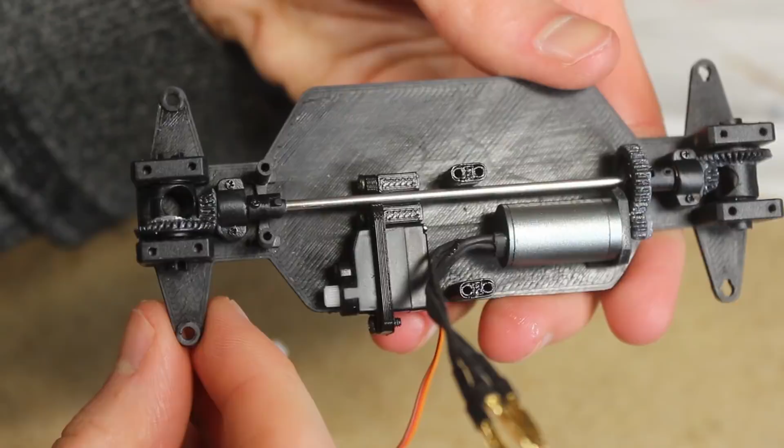Hello everyone and welcome. In today's video, I make some progress on the Skyline project by painting the body and installing the motor and drivetrain onto the chassis. I also get the Jeep ready for spring by doing a bit of maintenance and installing some accessories. And I show the design process of this jack stand in Fusion 360.

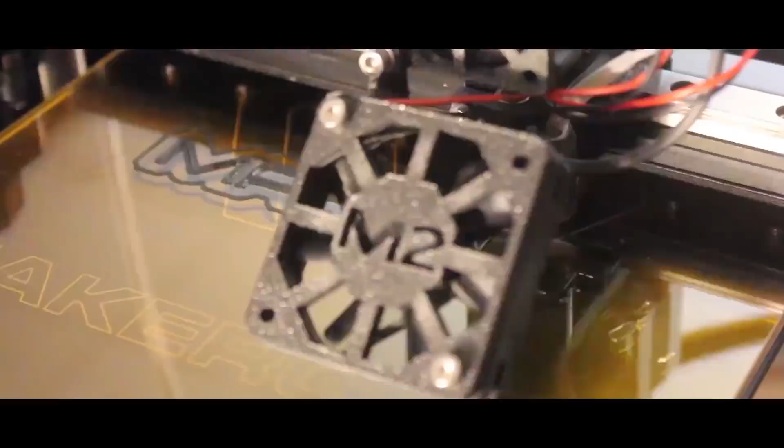So I've been able to make quite a bit of progress on the 3D printed Skyline project. After the post-print finishing and priming I did previously, I was ready to paint the body. Before doing so, I filled a small imperfection on the hood with a bit of putty, and I did a little bit of sanding on a few spots where larger imperfections were visible.

After that, I used a bit of super glue in a few spots around where the lower trim pieces had separated from the rest of the body. With this done, I was ready to paint.

I used some inexpensive Valspar spray paint designed for plastic on this body. For a color, I chose matte white. I figured a matte paint job would look a little better on this car rather than a shiny or glossy finish because of the slightly uneven 3D printed surface.

I layered on quite a few coats in order to achieve as smooth of a surface finish as possible. It was looking good so far, although I was losing some finer details. It's looking less like the body was 3D printed, and I like the matte finish.

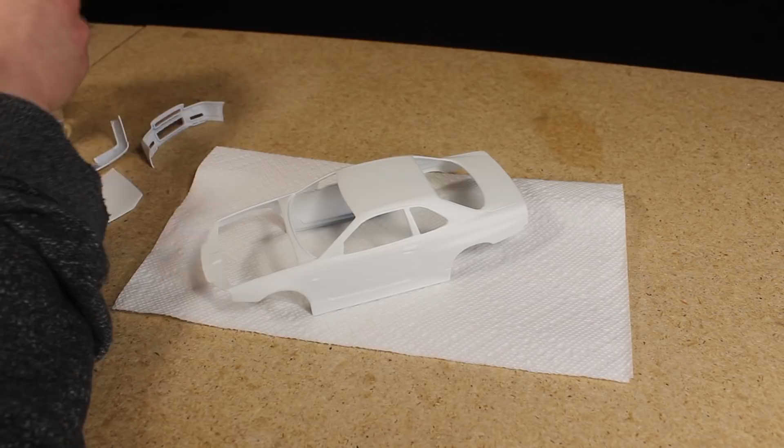Before moving any further, I wanted to wet sand the paint with some fine grit sandpaper to remove a bit of orange peel that was visible.

I applied some more lighter coats, trying to get the surface finish as close to perfect as possible. There's still a tad bit of orange peel, but at this point the paint was starting to get quite thick, and I didn't want to continue adding more coats.

I'm pretty satisfied with how it looks right now, although I still might do a bit of sanding with some fine grit sandpaper and apply a flat clear coat. I am definitely going to paint some details, such as the taillights and weather stripping around the windows. Additionally, I might add some decals or a livery to the car, but I haven't decided yet.

Moving on to the chassis, I've been able to make a little bit of progress on it. I'm still waiting for a few parts to arrive in the mail, but I was able to get the motor mounted and install the drive shaft.

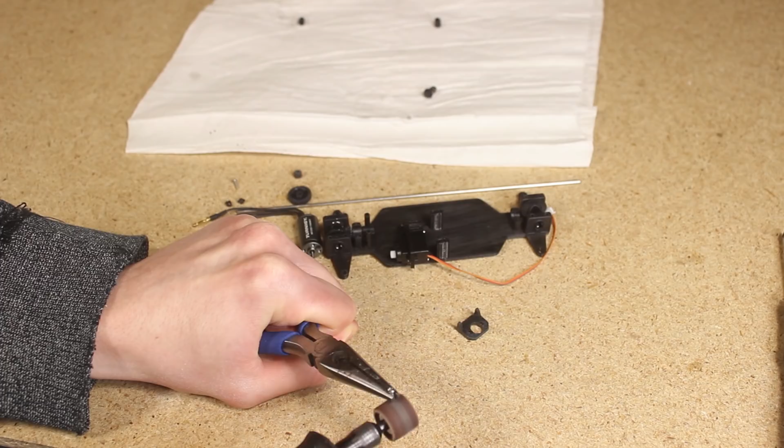I'm using a brushless Turnigy 11,000 kV motor to power the Skyline. To mount the motor, I simply threaded two 1.6mm machine screws into the front. These particular screws I had on hand were a bit too long, so I grinded them down a bit so that they didn't stick out.

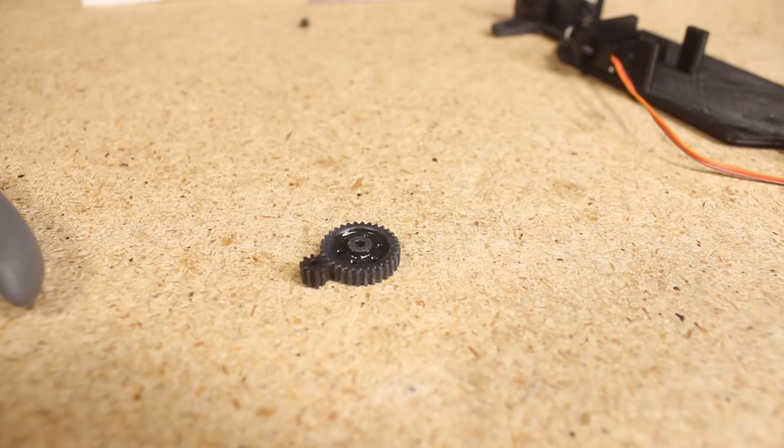These are the gears I'll be using on this chassis. The pinion gear for the motor simply press fits onto the shaft.

For the drive shaft, I'm using a 2mm steel rod, which I needed to measure and cut to the correct length.

With the drive shaft the correct length, I mounted the motor to the chassis.

I noticed that the shaft-mounted drive gear was colliding with the motor mount, so I trimmed off a little bit of material so that it would fit closer to the rear of the chassis.

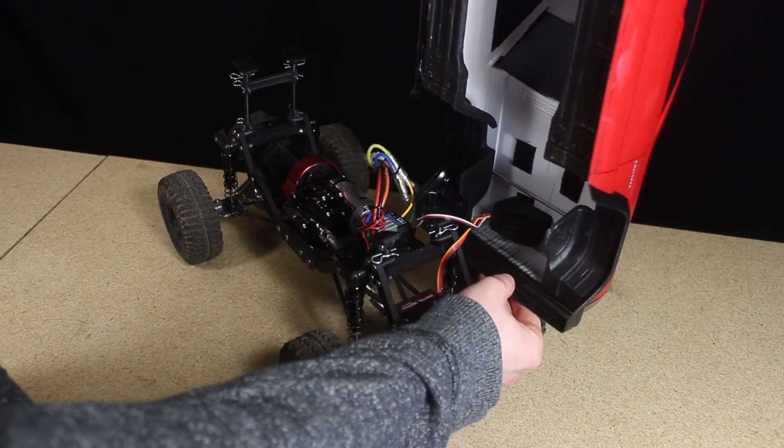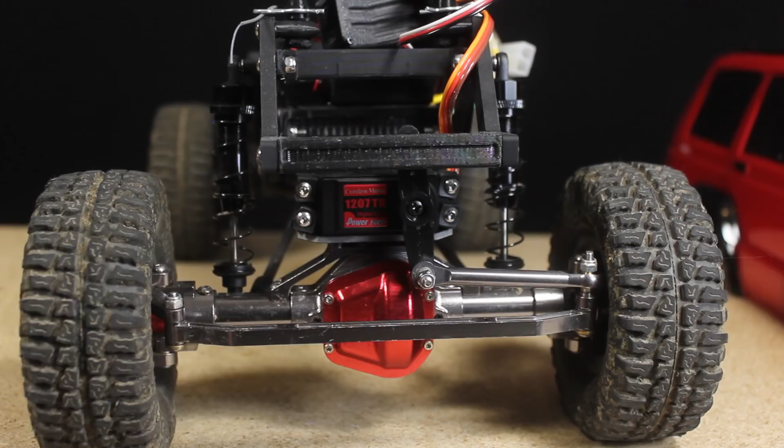I wanted to start by having a look at the servo, which had become quite loud and crunchy sounding while steering towards the end of this past season. I decided to open up the servo and make sure everything looked good inside and that the gears were properly lubricated. I began by removing the steering servo from the axle and disconnecting the steering linkage.

I then removed the 4 screws from the back of the servo and disassembled it.

Everything looked okay on the inside, but I figured since I had it opened, I'd wipe off all the old grease and apply fresh grease. I'm not really sure what the best lubricant to use on metal servo gears is, so I just used some white lithium grease. After that, I reassembled the servo, making sure that the seals around each section of the housing was in place, and then I reinstalled the screws.

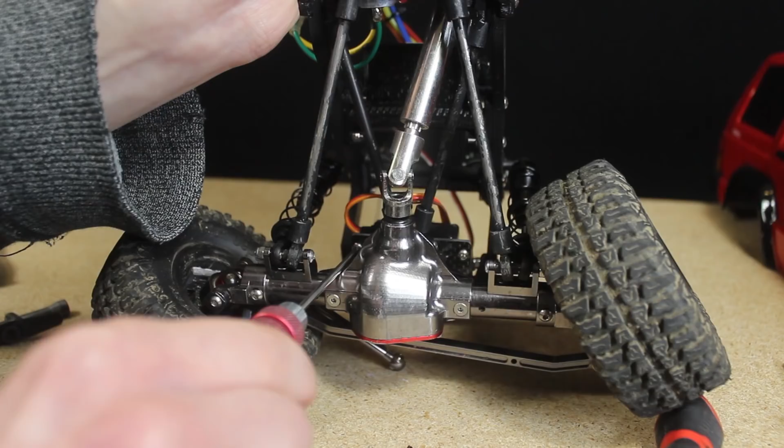A few of the bolts that mount the servo to the axle had come a little loose, so ideally I'd want to use a little bit of Loctite to keep them secure. However, I didn't have any on hand at the time.

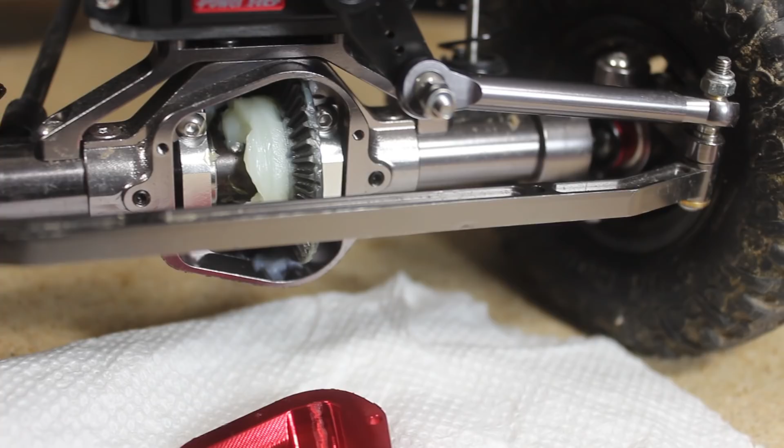After making sure the servo is working correctly, I remounted the linkage. Next, I wanted to remove the differential housing cover and ensure that there was enough grease inside and make sure that it's clean. As you can see, there's plenty of grease, and it doesn't look like any dirt or water has gotten inside.

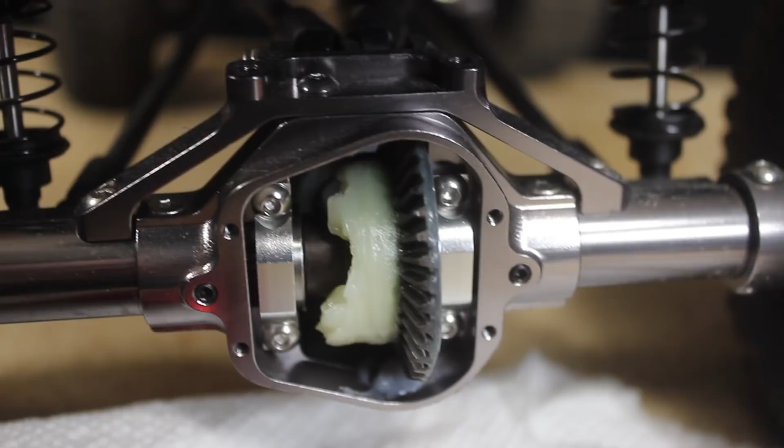Next, I wanted to check around the chassis for any cracked or broken parts, or anything that's loose, such as this upper shock mount.

With everything on the chassis looking good, I next removed all the wheels and checked to make sure that the wheel weights were solidly in place. A few wheel weights fell off while driving, so I wanted to re-glue them using some shoe goo and make sure none of the other weights were loose.

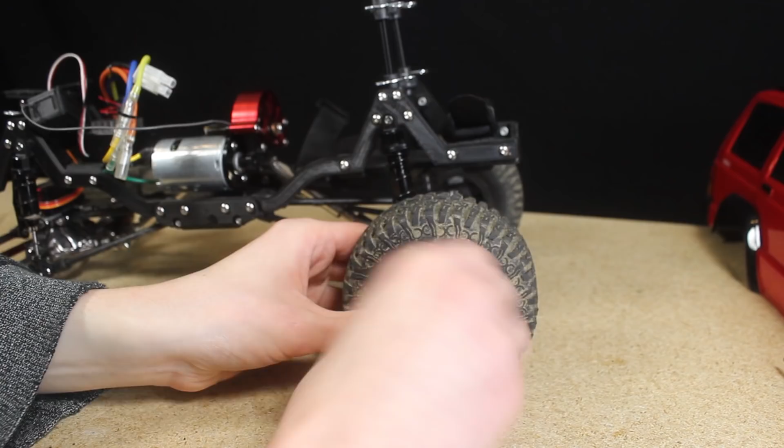Ideally, I'd like these weights to be around the outer edge of the wheel inside the tire. However, as I mentioned in a previous video, the tires are solidly glued to the wheels, so I just placed the wheel weights on the inside of the wheel, which doesn't look the best, but it works until I decide to get some new wheels and tires.

While waiting for the glue to dry, I redrew some sections of the body lines that wore off.

With everything looking good mechanically, I moved on to working on some of the accessories. I originally designed and showed these accessories in a previous video. I printed a roof rack, some trim pieces, and some side view mirrors, which is what I'll be adding today.

I really dialed in the settings on my printer before making these parts, and chose a slow speed and short layer height to ensure that these parts would turn out well. These parts turned out great, and won't require much post-print finishing.

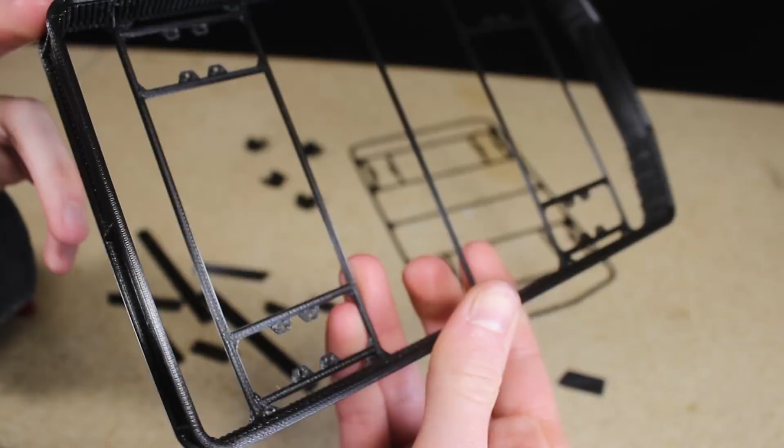I split the roof rack into 2 pieces before printing so that each piece had a flat bottom to sit on the print bed. I also used quite a bit of support structure to improve the quality of the finished print, which I removed using some side cutters.

I also used a drill and a knife to do a little bit of cleanup and make sure the holes were the correct size.

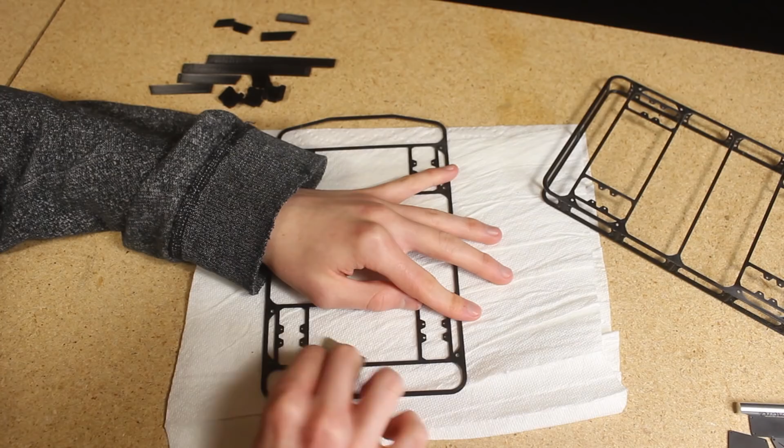I did a little bit of light sanding on the bottom surfaces of the 2 parts of the roof rack and glued them together using super glue.

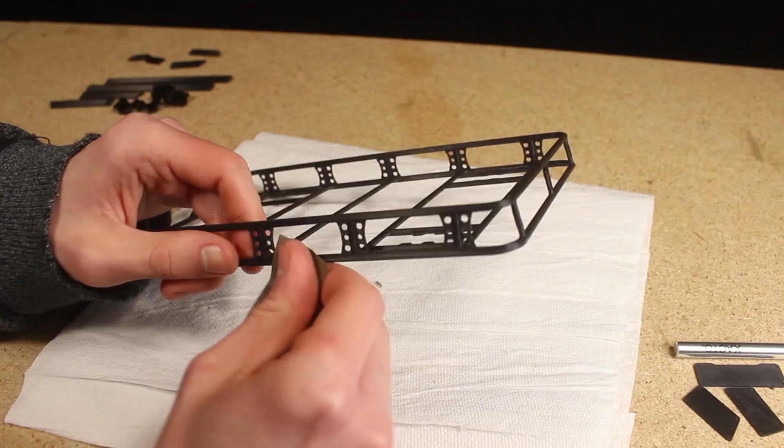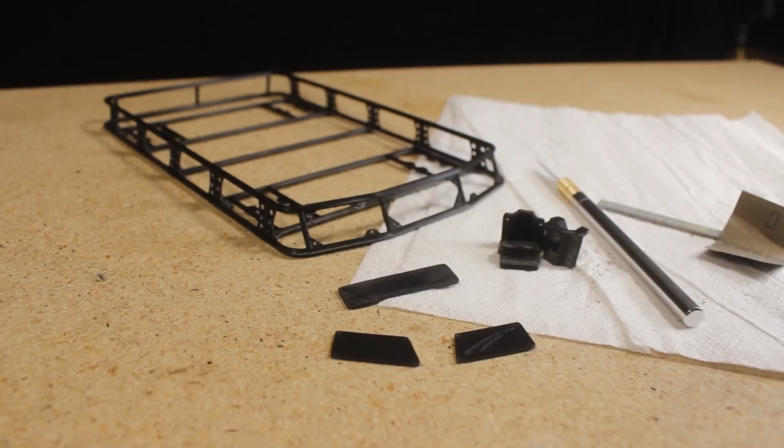After that, I did a little bit of sanding before applying several coats of primer. After just a few coats of primer, the surface was already looking quite smooth and ready for paint.

I just did a little bit of trimming in a few spots where there were some minor imperfections and re-drilled some holes.

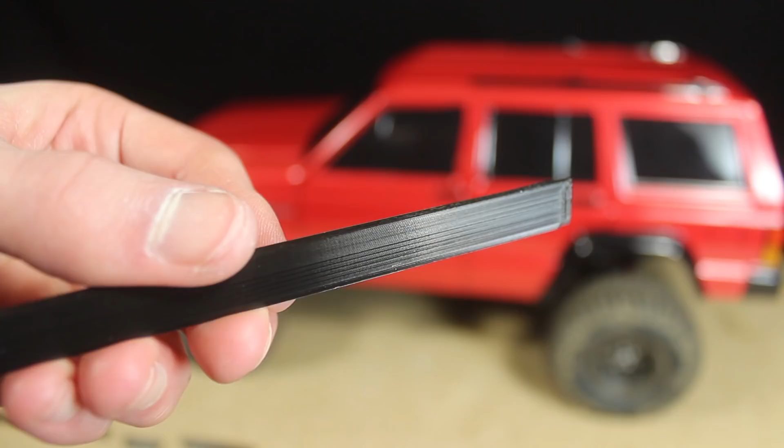The side trim pieces turned out very well. All I did was apply a few light coats of flat black paint.

To secure the trim pieces to the body, I used a little bit of shoe goo. Although the fitment isn't perfect and they stick out just a tad bit more than what I would have liked, I'm very pleased with how they look on the body. I think it definitely adds a bit to the overall appearance and helps add another layer to an otherwise relatively basic polycarbonate body.

The side view mirrors had already been painted black, so all I needed to do was add a little bit of chrome silver paint to make the mirror.

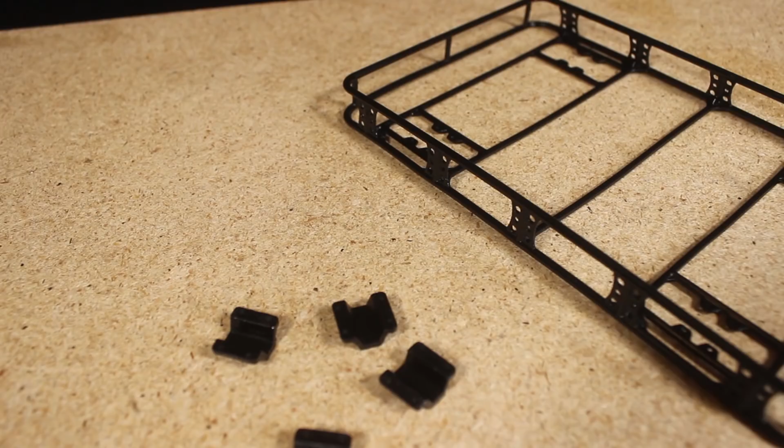After a few coats of satin black paint, I was ready to assemble the roof rack. The first thing I did was glue some magnets to the bottom of the mounts. I'm hoping that these magnets will be strong enough to secure the roof rack to the top of the body.

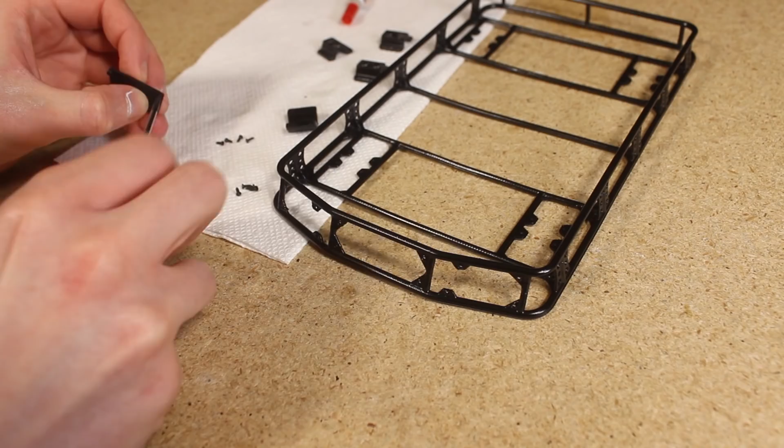The reason I don't want to use glue or screws to secure the roof rack in place is because ideally I'd like to have the roof rack be easily removable so I can place my FPV camera mounts on the roof for when I want to do some first-person driving. After that, I install the front panels onto the roof rack and install the mounts.

I think this roof rack looks awesome. It looks even better in person than it does on video because of the black color. Even with minimal time spent on any post-print finishing, the result looks great and definitely adds to the Jeep's appearance.

Finally, I was ready to install the side mirrors, which I secured using shoe goo. Here's a look at the Jeep as it looks right now. I think just these simple accessories really take the truck to the next level. There are still quite a few things I'd like to add to the body, including windshield wipers and cutting out the molded door handles and replacing them with more scale-looking 3D printed ones.

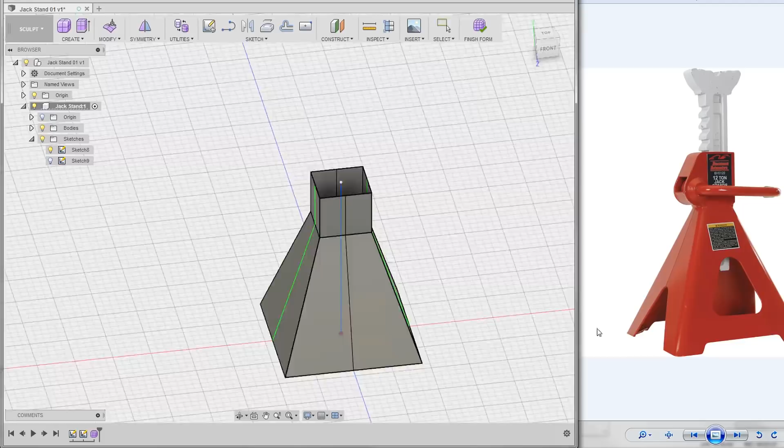I'm currently in the process of working on my 1/24 scale shop, which I made a video about a little while back, and I'm adding a lot of different parts and accessories to it, many of which I'm custom designing and 3D printing, including this jack stand. I'm using Autodesk Fusion 360 to design this part, using the image on the right as a reference. I started by using T-splines to create the general shape that I wanted.

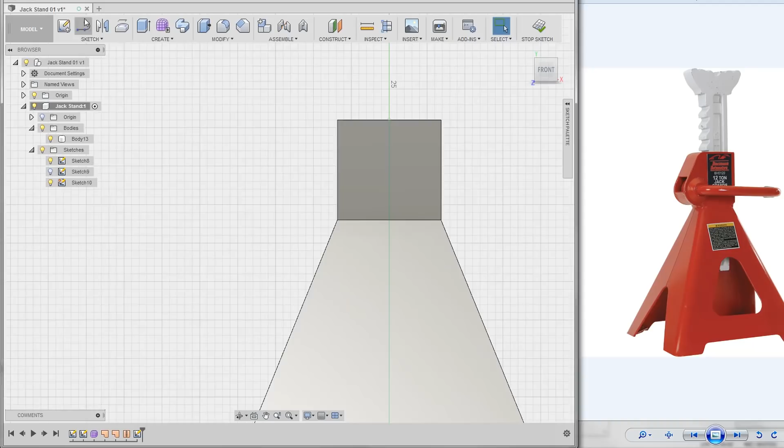One thing I'm keeping in mind throughout the design process is that this part is going to be a small 1/24 scale piece, so I need to make sure it's strong enough. You'll see throughout the process I make things like the legs and general shape of the jack stand a bit thicker than what you'd find on a full scale one. It's a mix between making the part look as accurate and realistic as possible, but also thick enough to support a sufficient amount of weight and be easily printed.

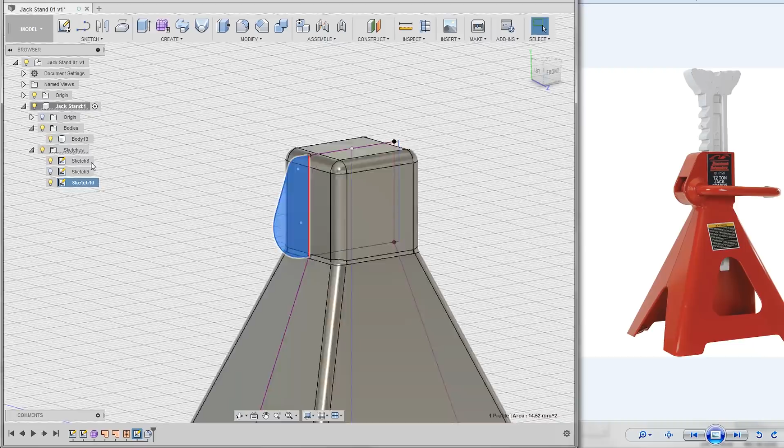I didn't worry too much about making the design a perfect representation of the reference material, certainly not as much as if I were replicating a car body that I wanted to look as accurate as possible. My only goal for this part was to make sure it looked like a jack stand.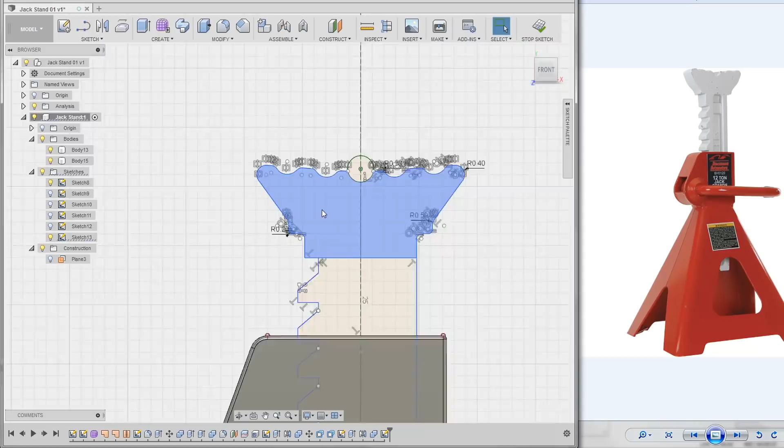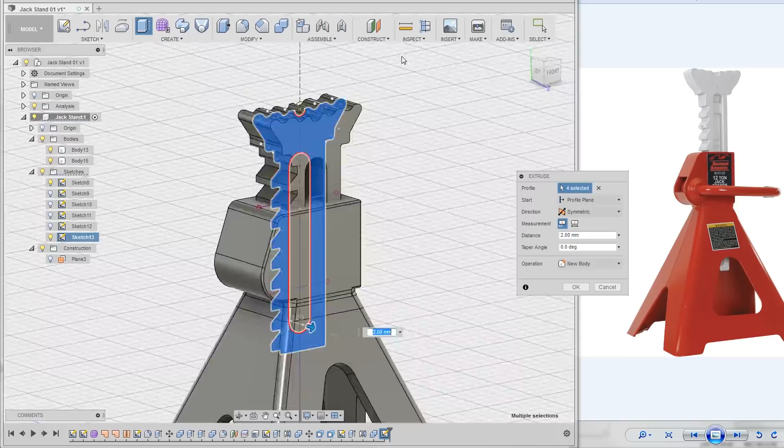One thing to note is that this jack stand won't be adjustable like a real one. I'm modeling this as two separate bodies, which I can adjust up or down within CAD, then use a Boolean command to combine them and export the model. I'll be printing some jack stands at a low height, some at a taller height, and maybe a few in the middle. But printing an adjustable jack stand in 1/24 scale that functions just like a real one just isn't practical.

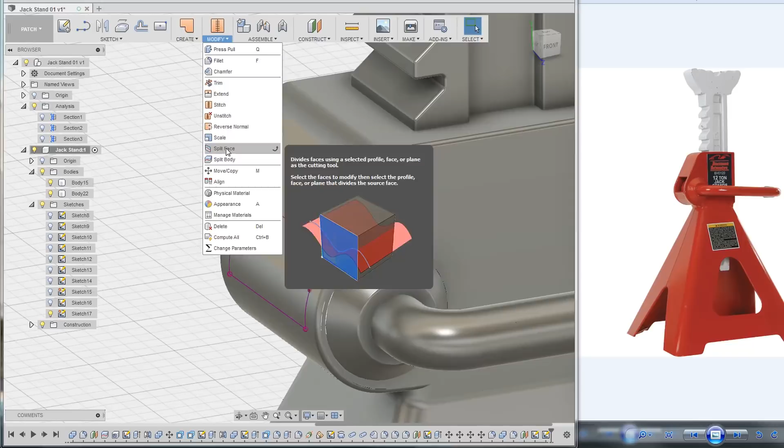I tried to make the design process as simple and easy to follow as possible, but if you have any questions, please feel free to leave a comment down below, and I'll do my best to answer it.

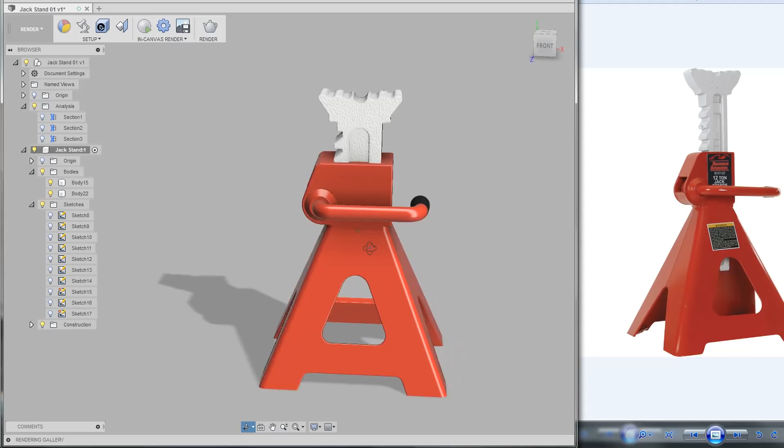Here's a look at the finished jack stand. I haven't had an opportunity to print it yet, although I'm definitely looking forward to it, since I know this jack stand will be a great addition to the scale shop. As mentioned earlier, this jack stand won't be height adjustable like a real one. However, I want to design a jack stand that uses a small 1 or 1.5mm dowel pin to set the height. I'll include that design process in next week's video.